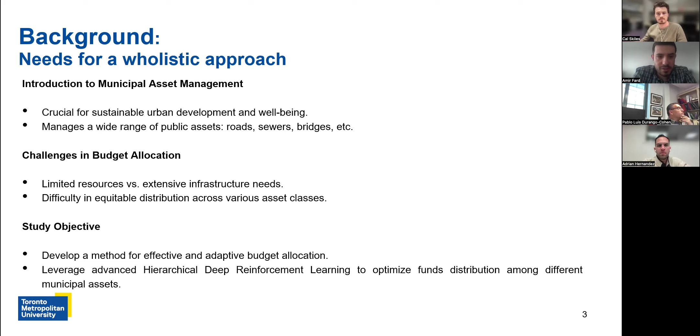So currently there is no rigorous plan or basis for decision making on how much each department needs, and usually this decision of distributing budget is based on the previous performance of the department. If a department, for example, the transportation department, could use the budget of the previous year, they can get more budget. And if a department cannot use its budget, they will get less budget for the next year. So there is no rigorous basis for decision making.

for budget distribution. And here in this study, we want to develop a framework for adaptive budget allocation among different asset classes. This framework is based on deep reinforcement learning. And this is a hierarchical approach that first distributes the budget between different classes, and then decides how you need to distribute that budget within each asset class among different segments.

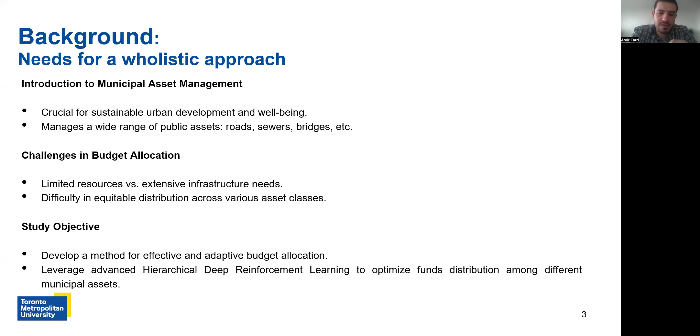So since the asset classes are very diverse and each one has unique needs and constraints and performance goals, addressing this problem is very important to provide a basis for decision making. And sometimes asset classes have different designated budgets. They have their own budget resource, and sometimes they may have a shared budget that they can use based on their needs, and it's up to the manager how to distribute the budget between asset classes.

Since we have different optimizations here, first we need to make a decision on how we can distribute between different classes, and then the next layer of decision making would be how we can optimize MRR activities within each asset class. And this needs to be done through an integrated approach of these two levels, because the decisions of these two levels are dependent on each other, and we need to provide the integrated approach.

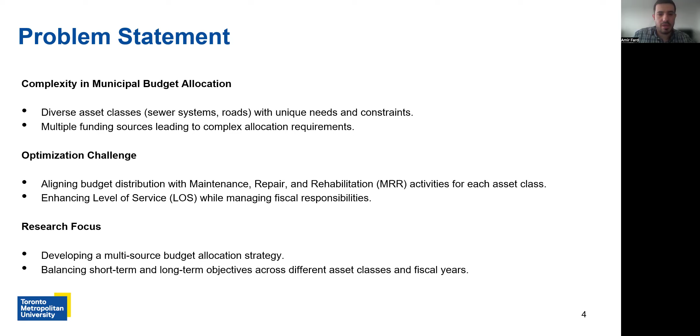So let's explore the problem for a single network when we have just a single asset type. Consider we have, for example, a network of assets. It could be a sewer network, could be a pavement network of a specific type. For that specific network, we want to maximize the overall level of service of the network over a certain planning horizon. For example, we want to optimize the average level of service of the network, and this average is a weighted average.

For example, in a sewer network, each asset segment has its own weight. For sewer, you can consider length. For a pavement, it could be based on the area, or based on the replacement value of a new asset of that pavement segment. So in general, you want to maximize the whole network level of service over a specific time, for example, 5 years or 10 years.

And here you can see this overall level of service is a weighted average of anticipated or predicted conditions of asset I at the end of, for example, year 1, 2, and so on. Since this is both a spatial and temporal average, we have 2 dimensions for the average. And here for the predicted condition, we can have a stochastic deterioration model, or we can have a deterministic deterioration model. In each case, the conditions of each asset would be a function of

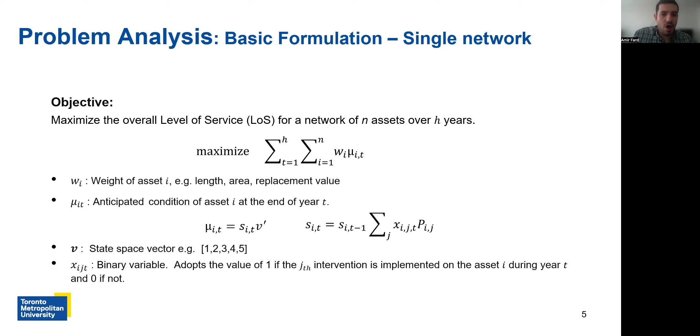And there are different ways to solve such a problem. Since this is nonlinear, you can go through, for example, genetic algorithm to optimize MRR activities. Or here you can transform the problem to sequential decision making. Sequential decision making you can formulate as an MDP problem, Markov decision process. At each step of decision making, consider you have a state, a state of the current situation of the network, and based on the current situation, you want to make a decision. You call that decision actions. So you have a finite set of actions.

If you have just a single asset, that action space would be, for example, if you have 3 options, your action space has 3 options. But if you have a network of assets, you have a combinatorial optimization, and your action space and also the state space explodes. And then based on the action you take, based on the transition models, which are a function of each action and could be a function of the state, you transit to the next state, and based on this transition, you will get a reward.

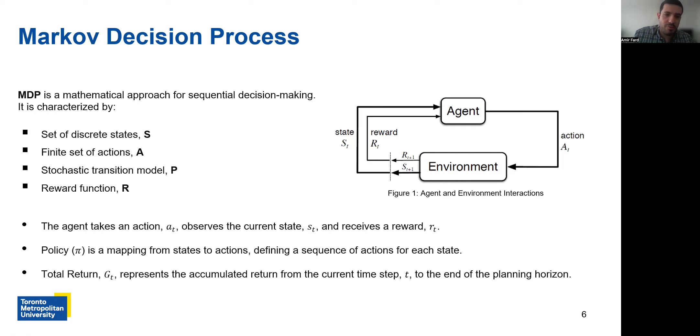So you can formulate the total return as an accumulated reward, and this is a discounted accumulated reward of the future reward based on your actions and states. And then you can formulate the action value function. This action value function is a function of the current state and the action, and basically it gives you how much benefit there is in taking different actions at that specific state.

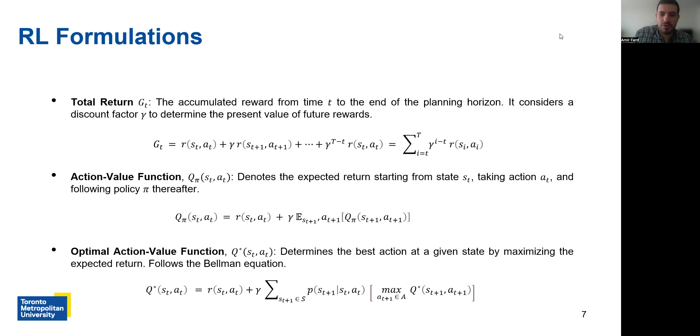And then in a reinforcement learning problem, finding the optimized policy is equivalent to finding the optimum action value function, so that at each state you can see which action can give you the maximum cumulative future reward, and then you can take that action.

So based on this deep reinforcement learning framework, we developed a hierarchical reinforcement learning framework that can integrate the two levels of decision making. The first level is when you have a budget for the whole planning horizon, how much you need to give to the overall system. For example, you have different asset types, different asset classes, how much you need to allocate from the overall budget of the whole planning horizon to that specific year.

And then from that allocated annual budget, how much you need to allocate to different asset classes. For example, if you have 3 asset classes or 2 asset classes of pavement and sewer, first you want to make a decision of how much you need to give to that specific year from the overall shared budget. And then from that annual allocated budget, how much you need to give to pavement, and how much you need to give to a sewer system.

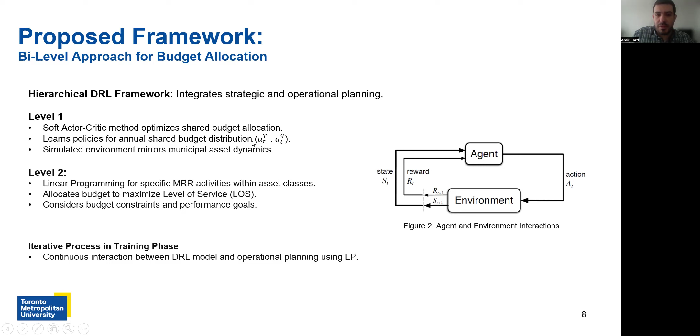So in this way, we can decouple the decision making and formulate the linear programming for each asset class based on the specific constraints of the asset class, and also specific objectives and performance goals. And here we have a training phase where we iterate this framework. In the next slide I'll show you how we train the reinforcement learning agent to optimize the budget allocation decisions.

And then when we decide about the annual budgets of each asset class, we go to the next level, and this agent is the annual maintenance planner. So we do linear programming for each asset class based on their specific objectives and constraints. And then we gather the information, the MRR activities decisions, to calculate system level of service. And the system level of service is a weighted average.

It could be based on different weights, for example, how much each asset class is important to and contributes to the overall system or municipal level of service. And then you can calculate a reward based on that weighted average of level of service of each asset class. And then, based on the decisions made, MRR activities in level 2, we transit the overall system, all the asset classes, and go to the next state. And then you can do this iterative process to train the agent.

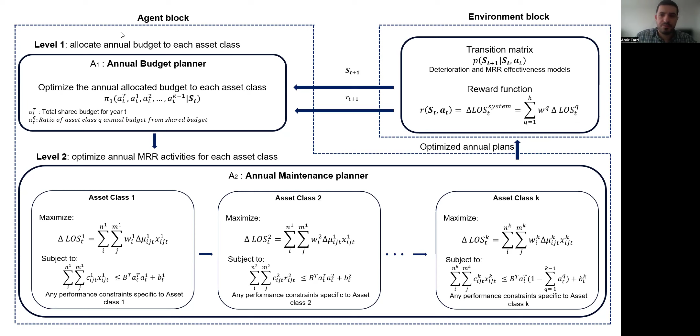So this is a case study for a Canadian municipality pavement network. Here we considered asset classes as different networks of the total pavement network. Consider arterial, collector, and local networks as different asset classes. It could also be a completely different type of asset, for example, pavement and sewer, or here we have subclasses in this case study. You can consider them as different asset classes. So in this study, we have 3 different classes.

And you see, for example, arterial road has more than 13,000 segments, collector more than 14,000, and local roads have more than 33,000 segments. And also here, the level of service metric is a pavement quality index with a 0 to 10 scale.

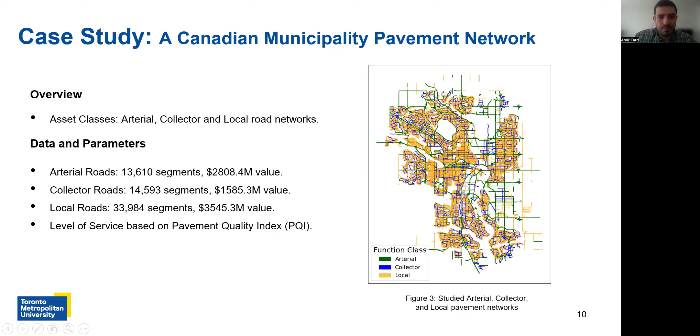Here you can see the initial distributions of the conditions for each asset class: arterial, collector, and local. This distribution is a weighted distribution normalized by replacement value, meaning the replacement value of a new asset, which you can consider as reconstruction cost.

And you see this is a heterogeneous network, so each single asset has its own condition and also its own treatment cost based on different options.

In the next slides, we explain what the deterioration models and treatments are. Here you see they have different initial conditions, and by system, we mean the weighted average of the conditions of all 3 networks.

So here the system condition's initial level of service is 5.74.

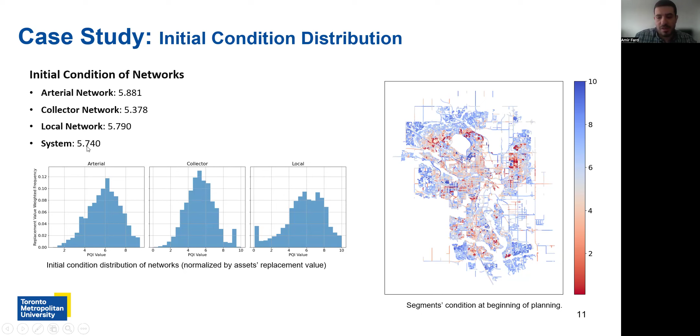We consider a simple deterioration model: exponential decay with 2 parameters. Each asset class has its own deterioration model. In this framework, even each segment can have its own deterioration model, but in this case we just consider that asset classes have different deteriorations.

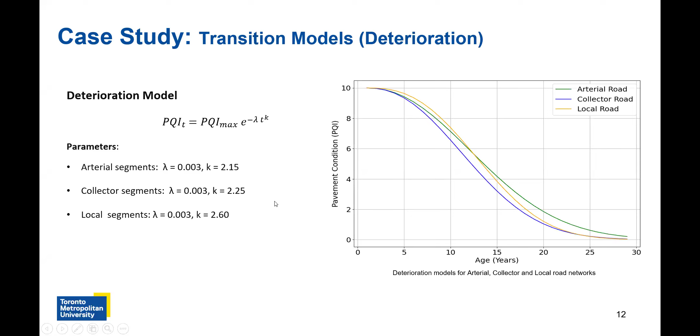Here this is a typo for local segments; lambda is 0.001. Sorry, just let me share again. Sorry. Okay, excuse me.

Here is the treatment effectiveness model. We have two options: rehabilitation and reconstruction. And if you also consider do nothing, its transition model is the natural deterioration model. In total we have three different methods, so for each single asset we can take three different decisions at each year: do nothing, do rehabilitation, or do reconstruction.

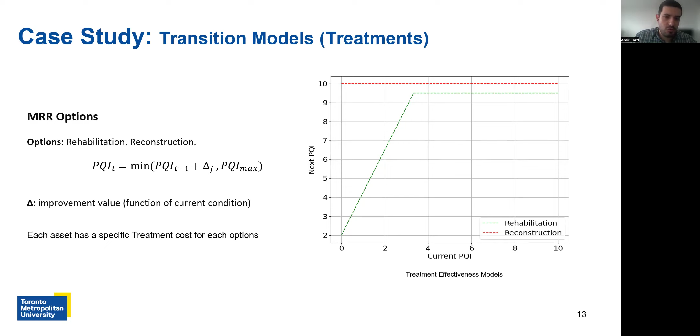This plot shows the effectiveness model, and the effectiveness is based on the current conditions for each asset. In this study, each single segment has its own treatment cost for rehabilitation and reconstruction.

Here is the budget assumption for this case study. Each asset class has its own designated budget that is fixed over 5 years. For example, the arterial network has an annual budget of $20 million, and for 5 years in total it is $100 million, fixed for each asset class, so they have their own designated budget that they can use themselves.

However, we consider a shared resource that is shared among all asset classes. On average, this shared resource is $100 million per year, and in total, in 5 years, you have $500 million. Here we consider a 20% tolerance flexibility, so each year this shared budget can range from $80 million to $120 million.

Here are the results. First, we consider different cases with different objective functions. The first case is to maximize the overall level of service of the system for 5 years. Here you can see the budget allocations for each asset class at each year, and then the performance of level of service over the planning horizon.

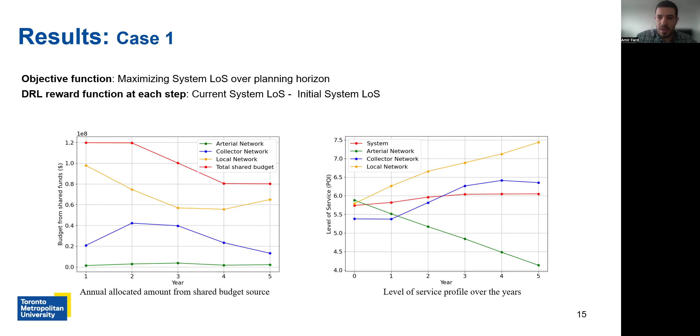So you see the green line is for arterial, and you don't allocate budget because you just consider the overall goal to maximize the system level of service. The budget allocation decision could be based on the system dynamics, and that's natural if you just consider the system level of service.

For the sake of time, let's go directly to case 3. Here we did a trick: instead of just maximizing the level of service for reward, we try to consider reward as the minimum of the improvement for each asset class. For example, calculate the improvement for each asset class at each year, and then consider the minimum of those 3 as the reward for that specific step.

So here you can see a harmonized development, and this is the difference for this case. You can see you're improving the 3 asset classes' level of service in a harmonic manner, and you can see the effects in the budget allocations and the changes in level of service.

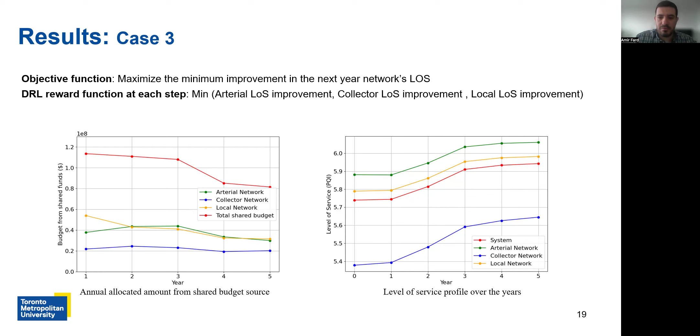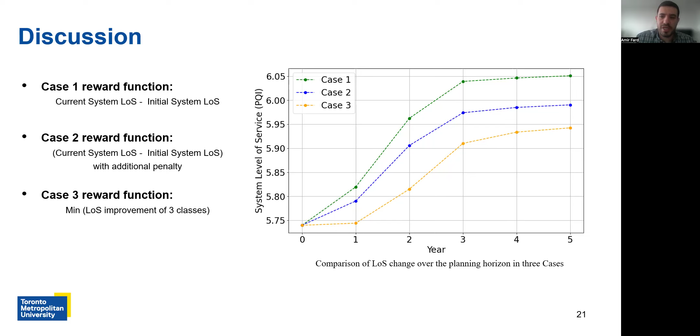And here is the difference: if you just compare case 1 to case 3, if you consider maximizing the system level of service, you achieve a better level of service at the end of the planning horizon. But the yellow line is for case 3, which is the harmonized development.

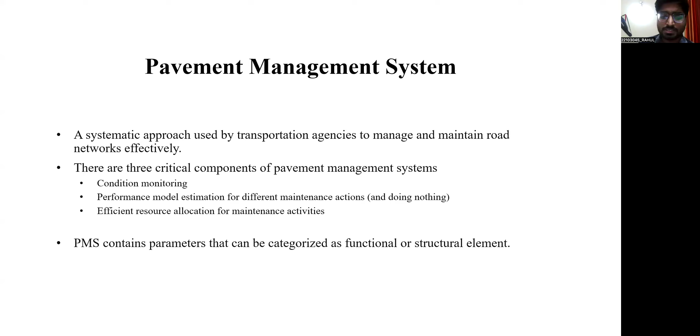This PMS contains some parameters like functional and structural. For example, functional elements are road user based elements that focus on providing a safe, comfortable, and efficient driving experience for road users. This includes roughness, skid resistance, roadside safety features, and so on.

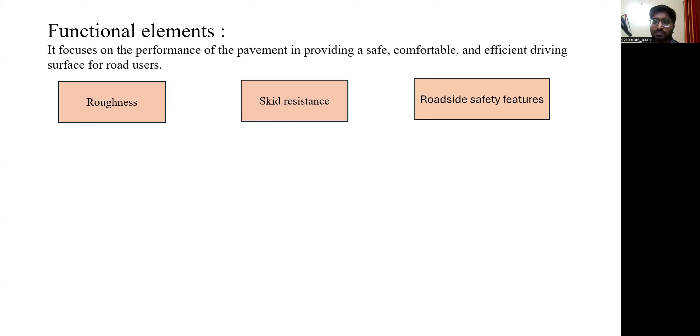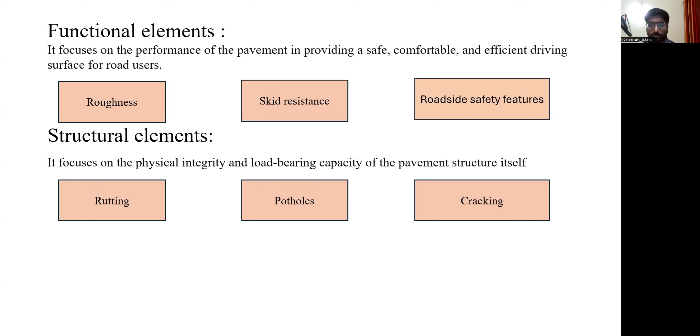Then there are structural elements that focus more on pavement structure, its load-bearing capacity and stuff, including rutting, potholes, cracking, and all. Out of this, roughness is a widely used metric in evaluating pavement condition in PMS.

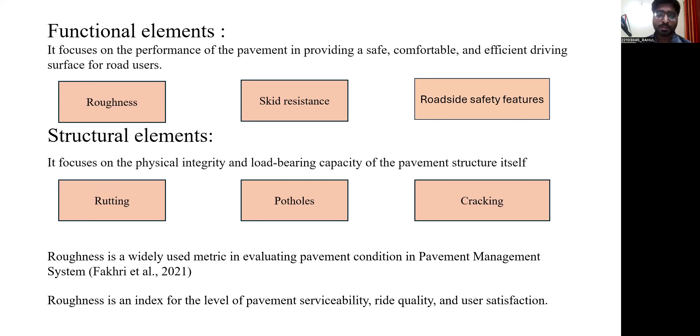Roughness is just an index for the level of pavement serviceability. You can say it is the undulations caused while driving. Coming to IRI, IRI is a commonly used method for documenting pavement roughness, and it quantifies the...

So it comprises a vertical deviation. You can see just longitudinal undulations you can observe while driving or while working on that. Roughness considers that, and it is typically measured in meters per kilometer or inches per mile.

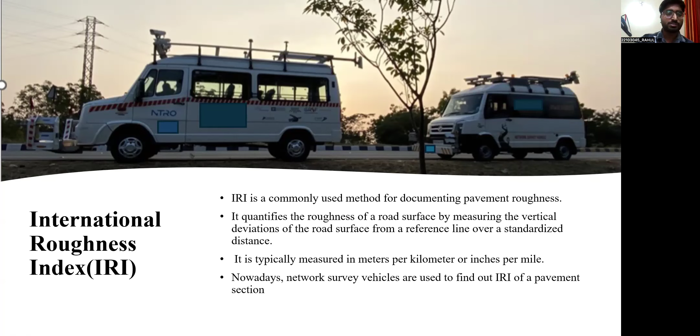Typically nowadays NSVs are used to find out IRI of a pavement section. NSV as in network survey vehicle. This uses laser technology. Basically lasers are mounted over the surface, and after a certain distance, the laser pops in and distance or undulation is marked.

As for IRI estimation, there are certain measurement errors observed in the literature as well. It might be due to operational processes, like a starting point issue or the path followed by the device, and then the speed, whether it is maintained or not. These kinds of issues.

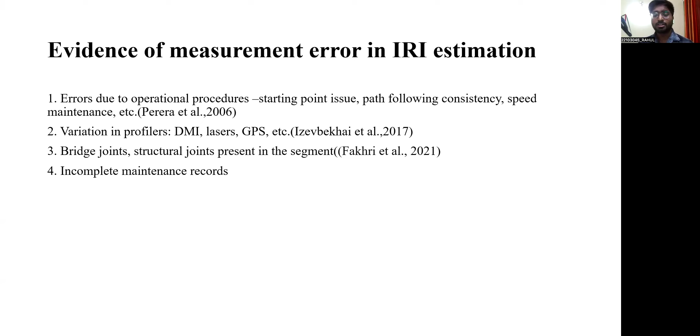Whether calibration has been done or not. Then there is variation in profilers, whether it is DMI (distance measuring instrument), lasers, or GPS. There are also pavement condition anomalies that constitute bridge joints or structural joints present in that segment. Also there are incomplete maintenance records, where if there is undocumented maintenance, the trend of IRI will reverse its engineering and will basically be noted as an error only.

Then there are strategies for mitigating the error in IRI. One of them is number of runs. If you increase the number of runs, say the same NSV working one time versus working on 5 runs, the latitudinal and longitudinal shift is averaged out of the wheel path. Thus LTPP performs 5 runs on each pavement section, as recommended.

He basically classified it into network level and project level. At project level, the distance is less, and you just have to perform quality assurance. For network level, there are deterioration curves, and present and future status of the condition is noted, since the distance is high. He recommends 1 run for network level and 3 runs for project level.

And in Indian roads, only 1 run is covered till now. So there is a need to analyze the effect of number of runs, so that we can quantify the final approach for the number of runs and its effect on repeatability. The second parameter we are considering is segment length.

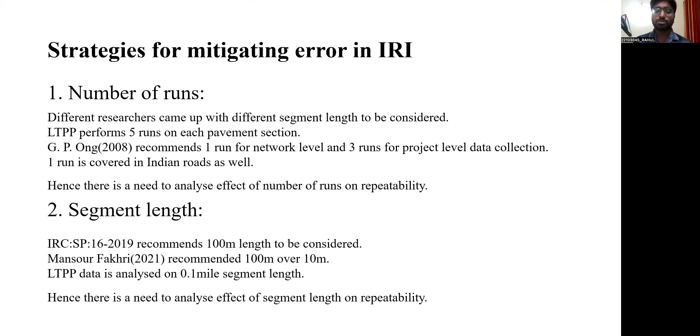So segment length, as in, assume the length is 10 meters or then it is 100 meters. What happens is the localized effects get reduced or get averaged out over the longer run. IRC recommends 100-meter length to be considered, and there's a Fakhri et al. that recommends 100-meter over 10-meter after performing some ANN modeling, and the LTPP data is analyzed on 0.1 mile segments. It also depends on the units that the country is considering. Hence there is a need to analyze the effect of segment length also on repeatability.

So then we'll come to the impact of measurement error in spatiotemporal assessment. We have this 60 kilometer stretch from NH44, and we have the IRI data after some period of time, they collect the data after every 6 months. One would assume after a certain interval, the IRI, since IRI increases if roughness increases, after a period of time the road gets rougher, and thus IRI should increase. Therefore if we plot a delta IRI, it should just be positive curves only.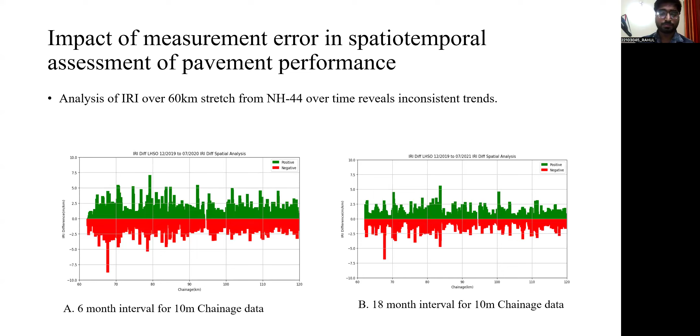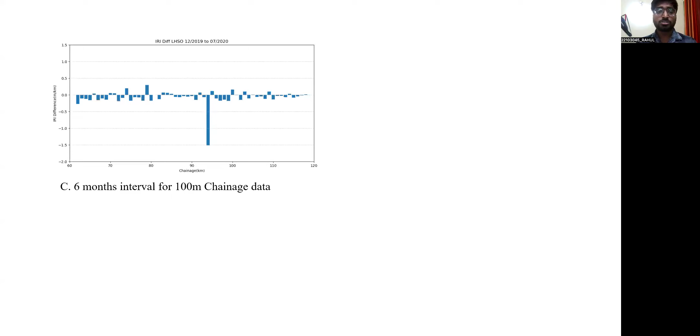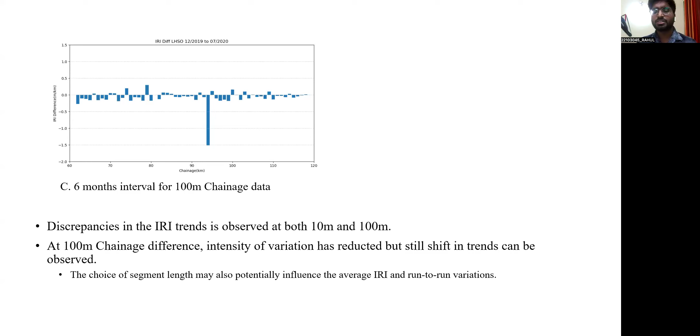We have done this on 100-meter as well. At 100-meter, you can see most, like all the points except one, are between 0.5 to minus 0.5, whereas at 10-meter it is like minus 10 to 10. So you can see the variation, the intensity has reduced, but still the shifts can be observed, negative and positive without any notice. So choice of segment length may also potentially influence the average IRI and run-to-run variations.

So we have this problem statement: we will evaluate the variation in IRI data collection as a function of both segment length and the number of runs being averaged. At the end, it's just a trade-off between segment length and number of runs, because if you increase the number of runs, the finance increases. If you increase the segment length, you'll get more repeatable data, but you will not see the localized effect.

We'll also assess the repeatability of profilers and the potential factors affecting the performance, be it features of profilers like type of laser used, pitch, and time of data collection, and the basic principle and calibration exercise done on that. And then there's presence of distresses, which also cause IRI to be high or low, and the path traced by a profiler.

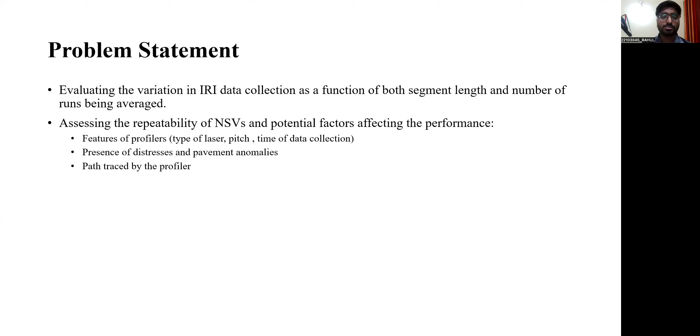Based on this, an experiment was performed to account for the repeatability of profilers and influence of number of runs and segment length on variation in IRI values. So a 12-kilometer stretch from NH44 was selected for the experiment, and out of this, we also did section marking to influence the variation caused due to the path followed.

We basically used chalk at a particular distance over 200-meter sections. 11 stretches were marked based on different categories of roughness levels, and then we did the marking on them so that the driver could see the marking and try to stay on the same particular path. We'll check the influence of this marking also later in my presentation.

3 profilers were used to calculate and analyze the IRI data, and we did 15 runs from these profilers to check the averaging effect. These were the 3 profilers, device A, device B, device C. The basic difference is the type of laser used, because speed is also an important criteria, but we haven't seen that in the literature, and also by our own experiment, speed doesn't have much larger effect on the IRI values. So basically the differences are type of laser, whether it be a point laser or a line laser.

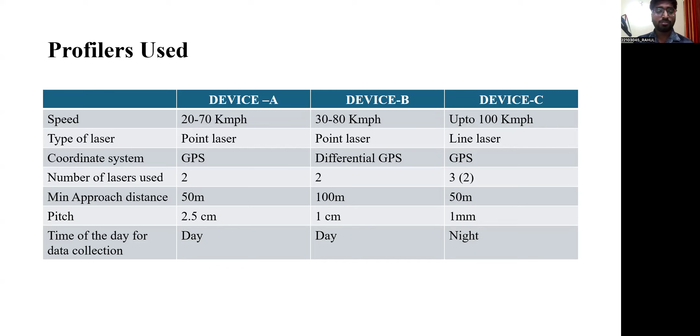So yeah, 3 profilers were used. And this is a picture from the experiment site. Basically this was just to perform the marking, and then the vehicle would run. And these were the chalk marks used for certain points. We used them across the 200-meter sections.

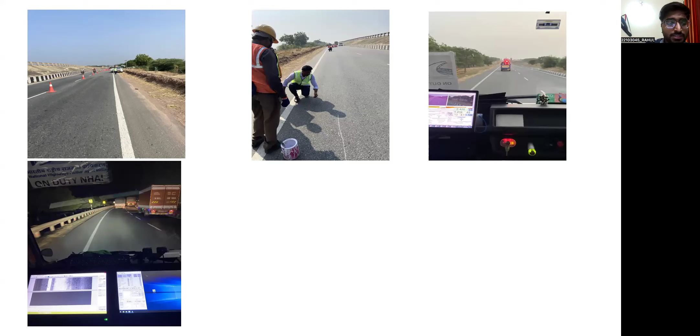And then these are the 2 survey vehicles that were on the ground in the daytime, and you can see a patrolling vehicle, basically to maintain the speed. And then we have one more device that works at night. This is the visual that you can see at night time. And finally, this is the team that worked on it, so kudos to them.

So data visualization, analyzing the effect of 10-meter and 100-meter intervals. We have 15 runs over 6 kilometers, and we created this box plot. In the box plot, for each segment chainage point, there is one box that is representative of the 15 run values, and the IRI values that come after that.

And then we also created this for 100 meters. The left one is for 10 meters. You can see that there is variability, run-to-run variation from segment to segment. But at 100 meters, you can see things calm down. But the spread is still non-uniform.

For the results, we used coefficient of variation as the metric for the measure of repeatability. This is just the variability of a set of measurements relative to the mean, that is, standard deviation divided by mean. So a lower COV indicates lower standard deviation, and thus repeatability is high.

So first, talking about the average across runs. In the next slide, I'll show the 15 runs. They are partitioned into different groups. For example, 15 groups of 1 run means we have just used the 15 runs individually. So that is basically 1 run.

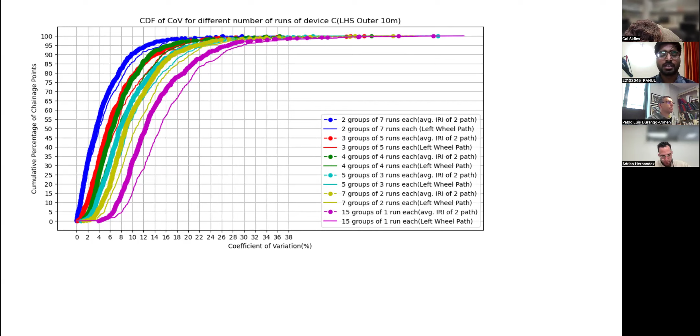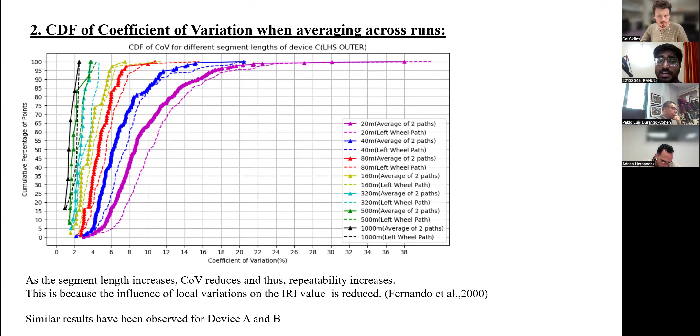So as you increase the segment length, the localized effects due to any joint or any pothole will reduce at a higher segment length. So we have also analyzed from the data that segment length should be high to keep the repeatability high. But this is just the COV, just standard deviation divided by mean. So it doesn't tell what the relationship is between the standard deviation and mean. Is the mean causing the COV to be less, or is it the standard deviation?

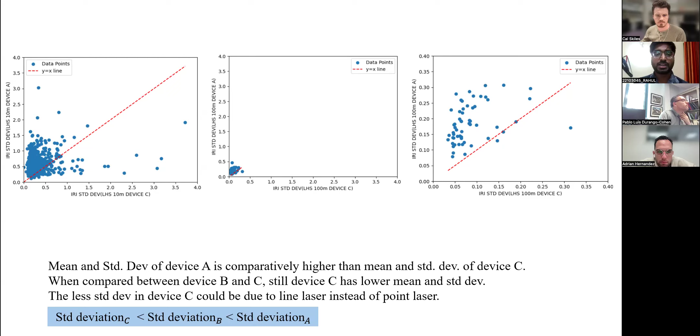And because this was not much visible, we zoomed in to see the effect, and you can see more points on the upside, and we did this on the other two devices as well. So less standard deviation in device C, and the potential difference between A, B, and C is the type of laser used, because that also reflects the pitch. The pitch is 1 mm for that device, so standard deviation is low for it. So that parameter is also very important. Line lasers are recommended rather than point lasers, and pitch should be low.

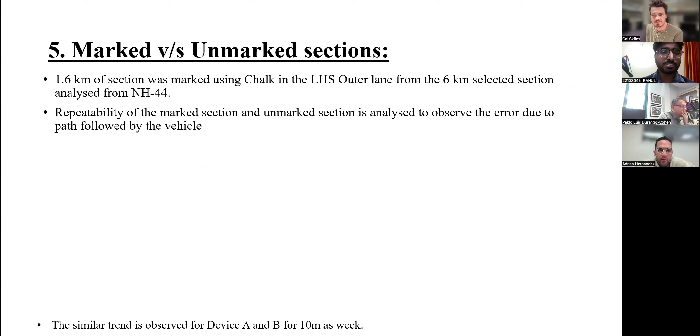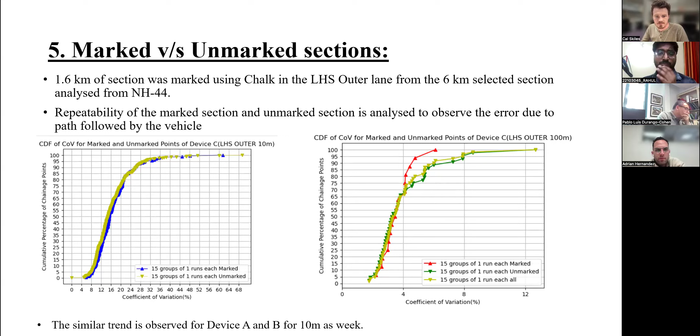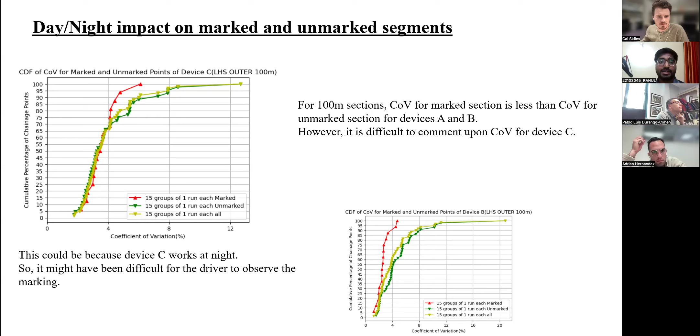Also, then importance of pitch. So now we have used both of the instruments that were measuring the IRI in the day. So then you can see the right one, the device B. Device B, which has a less pitch, like 1 centimeter pitch, is more repeatable. That has less COV. So as you can see, the pitch and the day-night effect is also important.

So conclusion, it is evident that measurement errors are present in the IRI data collection. Choice of number of runs is important considering the inspection objective, performing cost effectively. Since each time you increase a certain number of runs, the expenses get multiplied by the same amount. So choice of number of runs is very important, and the choice of segment length is important to make management decisions, because you can analyze even 1 kilometer data and see all the things looking good, but there underlie some localized effects which you will not observe.

And also the properties of NSVs influence the IRI variation. It's not just the pavement only; the NSV vehicles, which pitch it is using, which speed it is working at, and what the resolution is, are also important. And future scope, we will analyze the sources of high standard deviation points, whether it is joints or some cracking distresses.